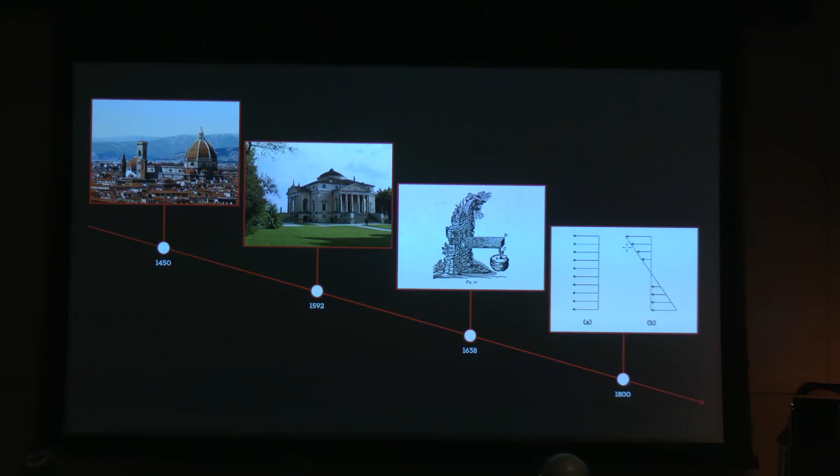On the far left, Brunelleschi's dome, developed by a single person and a lot of labor, and maybe a few other people, but generally Brunelleschi, well before the math to reference, no structural formulae to deal with, and no engineers to hand a sketch off and ask how big the chain around the base should be.

Palladio, with his palazzi and villas, all amazingly beautiful, with nary a structural or mechanical engineer in sight, and basic graphic statics and an understanding of prescriptive methods at his hands, and that's it. And by the way, in the New York City Building Code to this day are not the rules for palazzi, but prescriptive methods for designing townhouses, where an architect can go into the code and build a townhouse and sign and seal the townhouse based on rules given by the code that were first written in the 1800s. So this tradition lives on.

So then you get to the third slide. 1638, 200 years after Brunelleschi, Galileo, the father of essentially all of science, ventures into structural engineering, and among us structural engineering nerds, completely blows it. He posits that the stress-strain curve is pure stress or pure strain, and that the piece of wood in the wall will simply pull directly out of the wall when it fails rather than rotating about its neutral axis.

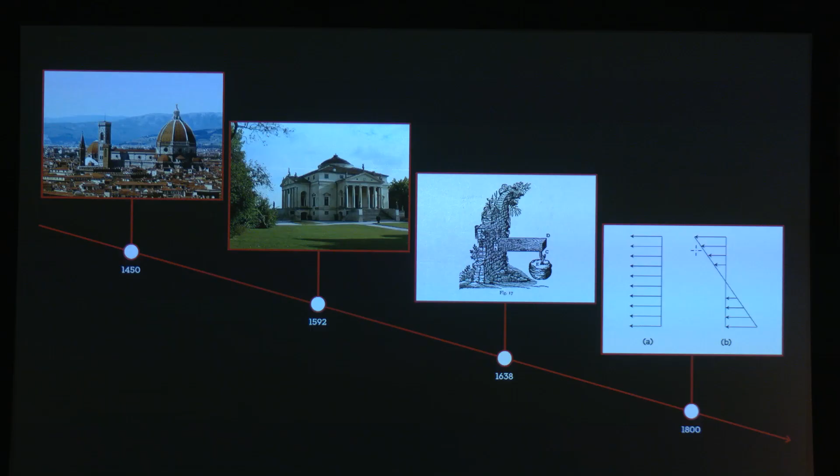It takes 150 years for Navier to come along and point out that Galileo was wrong. He had to wait till Galileo was dead and so on, but he did point out he was wrong. And he essentially births the modern structural design movement 350 years after Brunelleschi builds his dome.

We head into the 19th century to the Crystal Palace, and Joseph Paxton develops this building based on experimenting with flowers and lilies, according to the, of course, always truthful Wikipedia. It is said that he floats his daughter on a bunch of lily pads to figure out how strong they are, and he builds the Crystal Palace.

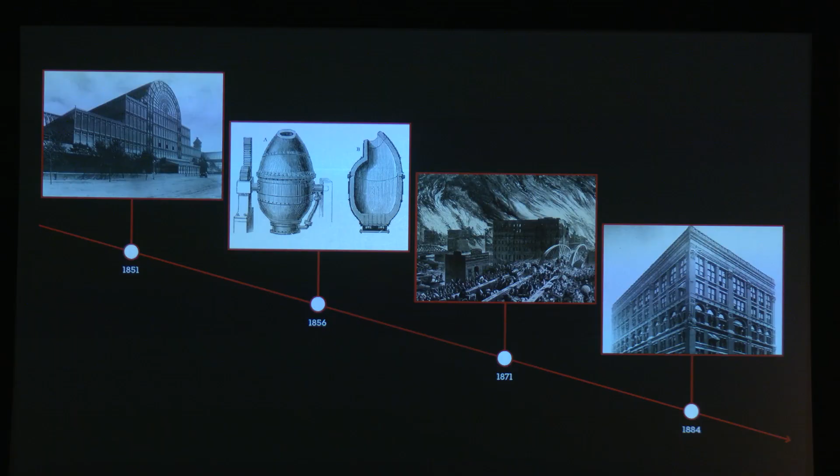Bessemer comes along in 1856 and invents carbon steel. But nobody cares about carbon steel until the Chicago fires and William Le Baron Jenney's Home Insurance Building. Still, not an engineer in sight. William Le Baron Jenney graduates a year before or a year after Eiffel from the L'École in Paris, and basically goes it alone as architect, engineer, and builder of the Home Insurance Building.

And then the birth of modernism. And the entire idea of modernism around technology, minimalism, or efficiency, let's say, and materials. And yet even the modern masters really embraced, and it was unfortunately, the great man theory. The modern masters went it alone for the most part, with very little reference to collaboration within the earliest masterpieces of modernism.

And in fact, the story is that August Komendant, who is the structural engineer for most of Louis Kahn's work, boycotted the opening of the Kimbell Art Museum out of distaste and anger at Kahn for dismissing his contribution to Kahn's work. So there was not the collaborative spirit that you see these days.

Utzon famously wars with Peter Rice and Ove Arup throughout the entire design and construction of the Sydney Opera House, developing what is clearly one of the most iconic and beautiful buildings in the world, but has nothing to do with the shell structures of Candela, Nervi, or Torroja. There is more reinforcing and concrete in the base of the Sydney Opera House than you'd find in almost any concrete structure around. So we are not quite at collaboration.

What I would put forth to you, and I can be corrected, we can all play this parlor game. Feel free to correct me. This is a very quick survey. What I would put forward to you is that it is really not until the Pompidou Center, and it's not because I've been fortunate enough to work with Renzo Piano. I do think the Pompidou Center was one of the first projects that showcased, while there may have been collaboration on previous projects, the Pompidou Center was all about the collaboration between Piano, Rogers, and Peter Rice at Ove Arup.

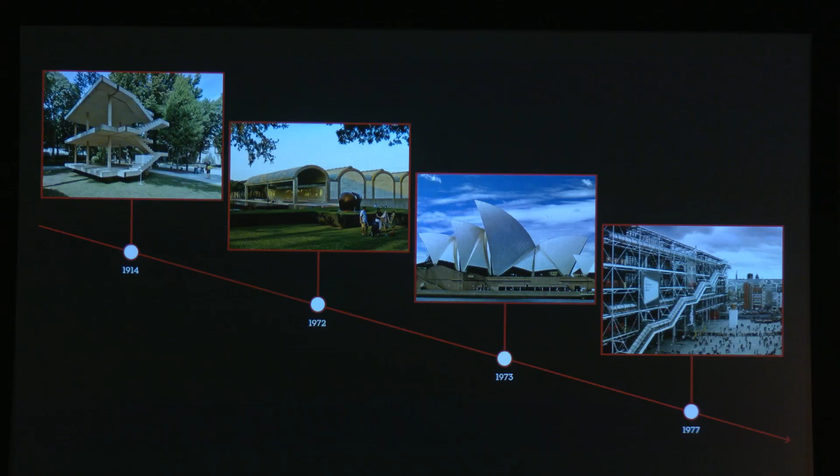So this is sort of the dawning in the early 70s of the idea that a team can build a machine. And they developed the Pompidou Center. I'm not sure it's too removed in my mind, as I thought about it coming into campus today, from putting a man on the moon and many other advances at that time. So the idea that a large team could get together and get equal credit and urge each other along comes into focus.

But think about where we are. We're 50 years back from today, and I started 500 years ago. So we're talking about 10% of the built environment around us, essentially, not by volume, but by years. Although a lot of those structures lasted quite a long time.

Mario Salvadori, a mentor of mine, comes into focus. He actually taught for years at Columbia, but he publishes Why Buildings Stand Up, and essentially changes the entire pedagogy of how structures is taught in architecture, where he really speaks eloquently and beautifully about the language that we speak between each other. And I want to keep an eye on that word language. All right, that is, to me, the key to everything that we discussed today.

Mario spoke of this language in a talk he gave in 1958 about teaching structures in architecture school, his early ruminations that ultimately birthed, as I said, a whole generation of collaborators. And I want to quote him here from that talk in 1958, quote, "And as soon as I say that we engineers are most eager to collaborate with you, I mention the first great difficulty. Architects and engineers do not have a common language."

"If you go to the average engineer and tell him," and he used only male pronouns, I apologize, "that you want to design space, he laughs in your face. If you tell him that you are looking for beauty, he tells you the only thing that matters is economy." We've come a long way since then. Through Salvadori, Rice, Piano, Rogers, and all the rest, we have learned to communicate.

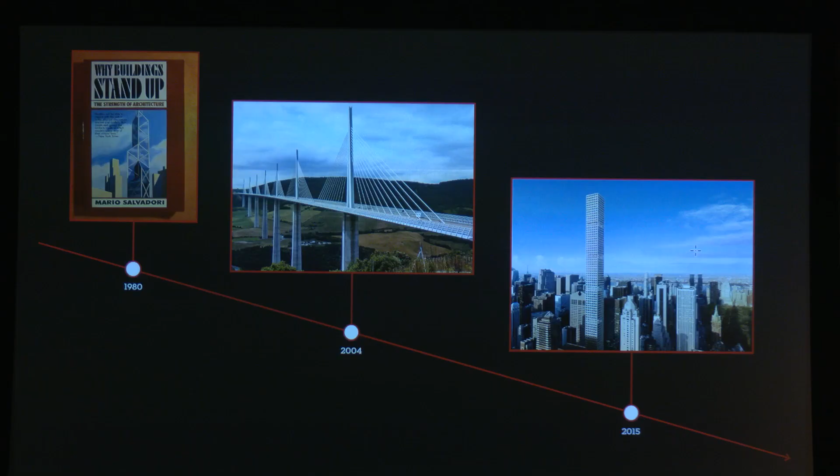No matter how inspiring a project may be, we do have a grounded, fundamental responsibility. Our primary goal is to keep the left-hand curve, the stress in the structural element, generated from external loads, far enough away from the right-hand curve, the material strength, so as to be safe, but close enough so as to not be uneconomical. Piece of cake.

It is a piece of cake once we get there, but 99% of what I show you tonight was accomplished well before we got to that point. I say this simply to note that one of the hallmarks of the collaborative revolution of the last 50 years is the invitation for us, the engineer, to join the conversation well before the bell curves are in play.

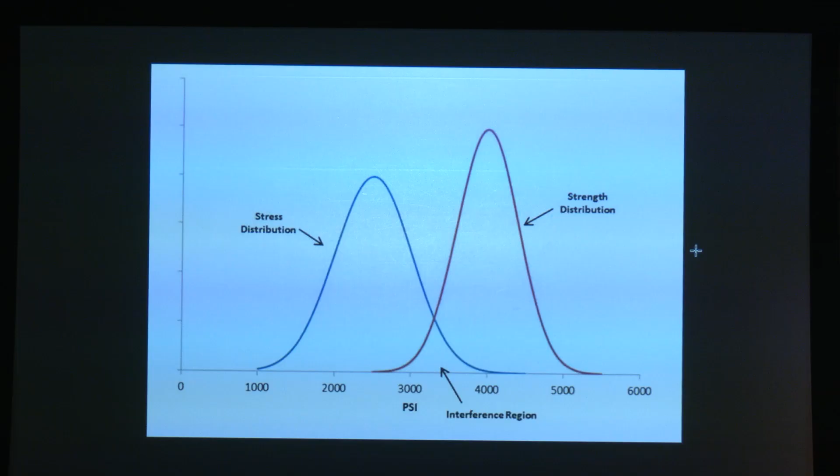In this case, the business of interrogating collaboration is to understand the balance we bring to every collaboration. The installation is temporary. Therefore, we get to play with that left side of the curve a little bit and the loads applied to the heart. And the ownership of the vision is firmly in the designer's hand. This is not a collaboration where we are upping each other's game to get to a new design paradigm. There is a design that we have to make sure doesn't fall down.

This language is one that often allows for mock-ups, in situ load testing, and the like. Designers have an image, they build it in their studio, and then we just push and pull on it rather than try to run models or basic formulae. This was especially true with the Big Bamboo installation on the roof of the Metropolitan Museum 6 years ago.

Big Bamboo is an installation designed by Doug and Mike Starn, who are well-known artists. There's an incredible video on YouTube from about 10 years ago, I think, or 8 years ago, where they literally walked this sculpture across their studio in the course of a year and filmed it in stop-motion photography, where they basically took bamboo sticks every day, took them off the back end and added them to the front end, and walked the sculpture about 300 feet like a massive slinky across their studio.

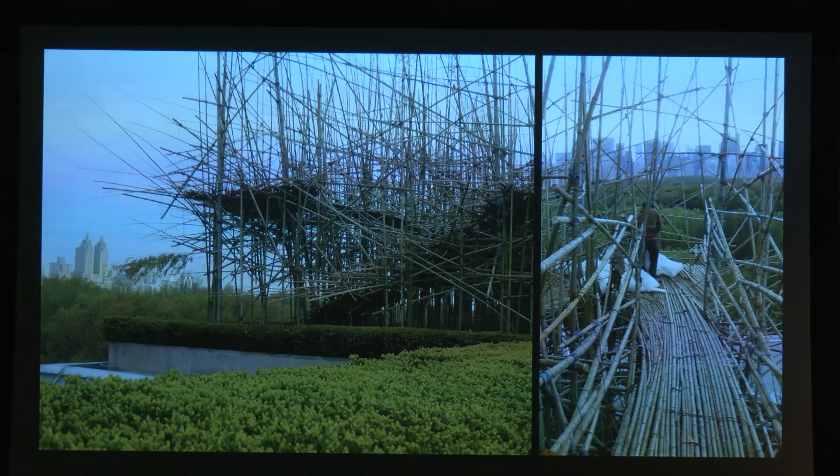The bags you see there are our version of load testing. We knew that this thing was not going anywhere. That's actually the first thought we had. So all we had to do was validate and prove that, and our collaboration with the Starn brothers was simply that they allow us to put some sandbags on the walkway and that we could look at the overall dimensions of this thing and get a general sense that it wouldn't blow over in the wind, which we then signed a letter to the building department, and all was good, and it didn't fall over.

It's unoccupied. So the biggest design collaboration portion of this project was essentially detailing the stone wall so that the excessive deflections would not crack the stone throughout and that the gaps in the joints would not be too big as to seem unsightly or veneer-like. But that was the extent. The other part of it was convincing the local officials and engineers that we were not insane, which we eventually did. They made us sign many letters, which we did. It stands to this day. The biggest challenge turned out to be that they were worried the bell would ring in high winds, but that was not our responsibility.

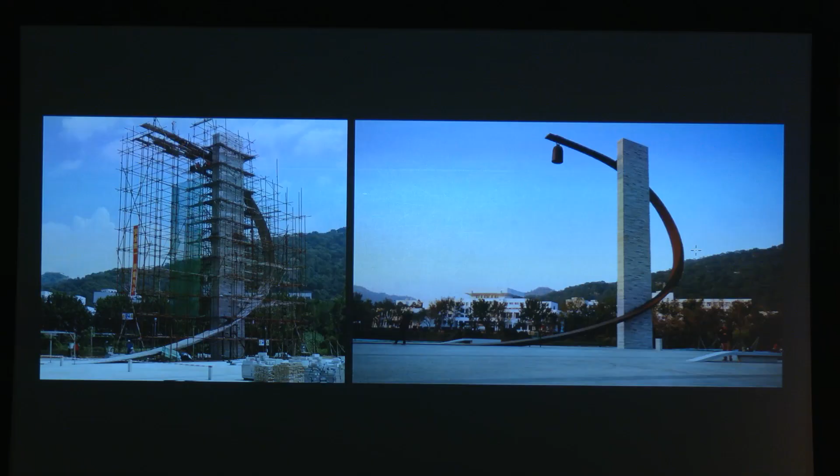So I want to now build a little bit to the next size projects. Before diving into full buildings, I want to go through a couple of small examples of projects where the collaboration was more about getting unique structures built. They weren't sculptural, they were architectural in a simple definition that they were there to solve problems that existed, and there was a client and somebody paying for this, and there was a desire to do something a little different.

So the collaboration on these jobs: this is a wonderful canopy installed at the University of Wyoming by Lewis Tsurumaki Lewis, LTL Architects in New York City. I've taught for 20 years with Paul Lewis, so we have a very close collaboration on these projects. And the basic idea was, how can we do this in a way that's detailed and designed that we can get local builders who are really busy and have no interest in doing something different to be interested, because we're using very, very common techniques to build something unique and different.

So the entire discussion around this collaboration was simply detailing the job in a way that allowed local subcontractors, again, they're not worse or better, I'm not making any judgment at all, they just have a lot of work. And why do this necessarily when you can do acres of the work you always do? So it was trying to figure out with LTL how to design details that mimic those other things they did, facades and so on, so that they saw this as another job that they would do with a slightly different skin that was delivered to them, and nothing else would be different.

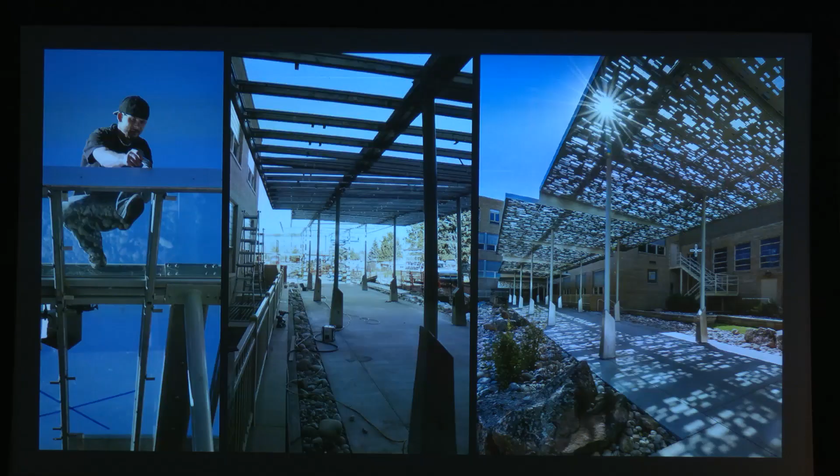We set all the columns at a certain elevation so that as they laid this canopy out, the work they were doing was no different than the work they would have done elsewhere, and resulted in a unique proposition. Similarly, the kayak storage shed at Long Dock Beacon that we worked on with ARO.

As I was mentioning to one of your professors during the tour of the studios, the interesting thing in New York, when I talk about collaboration, is that everyone knows everyone and everyone's related in some way. And Paul Lewis, one of the Lewises of Lewis Tsurumaki Lewis, is married to Kim Yao, the partner at ARO, and they all get invited to the same competitions. So I show these two back to back as also the relationships that evolve way beyond collaboration.

This project, which has been published quite a bit and we're incredibly proud of, was built for almost no money. What you don't see is a series of very simple galvanized beams above, 8-inch wide flanges, a totally common construction technique done by a local ironworker, a miscellaneous metal shop. I think they do motorcycle repair on the side.

And galvanized metal deck, composite metal deck, just hung from the bottom of the beam rather than placed on top. The storage racks provided lateral bracing, so we had wire cross-bracing across the basic off-the-shelf storage racks, allowing for 2 incredibly thin columns up front that did no work in terms of lateral.

Building again further, but in a very unique collaborative spirit, is the work we've done over the last 20 years with Gluck Plus. Gluck Plus is a firm that came out of the firm Peter Gluck and Partners, and now has 4 younger partners, younger, all in their 50s. Peter's son Tom, and 3 others who I've worked with now for 20 years. This is Tom Gluck's house, built on a shoestring.

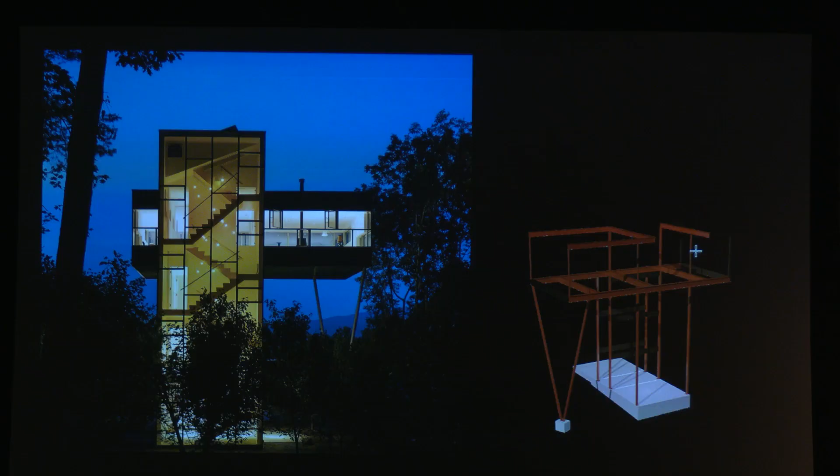So Tom knew he wanted to build this house for himself and his wife and 2 kids. He wanted it to be different. His father had bought a piece of land that he built his own house on 20 years before. He was able to afford this basic steel frame, but the rest of the house is all in simple plywood shear wall for lateral support, and then the upper portion is all various cost-effective, I'll say, not cheap, skins and so on that allow the house to rise up into the treetops with all the lateral being supplied by plywood shear walls at the base.

It did move a little bit until we put the windows in, which with a paying client that wasn't the actual architect, we probably would have not played with, but since we knew Tom wouldn't sue us, at least not yet, we were good to go.

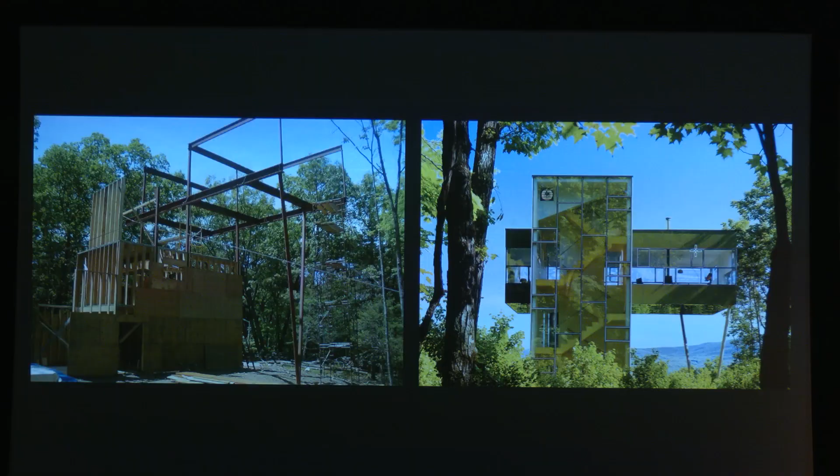This built into a number of projects with them, which I'll rifle through very quickly, but again, it isn't just small follies. This project in Austin, Texas, we ended up with a pretty massive truss, and again, a very close study. We probably studied 20 or 30 different truss profiles to get the windows in the rooms where they wanted, but an efficient truss that the house could afford. And it allowed for this sort of seminal moment in the house, a house that's pretty widely visited in Austin.

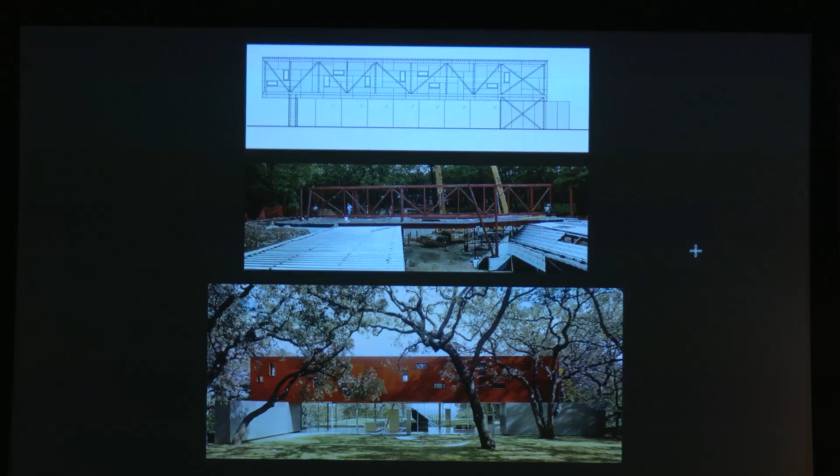And finally, out of about 30 projects we've been fortunate enough to do with Gluck Plus, is a recent wonderful project in the Bronx. This is a public tennis facility that was built about 2 or 3 years ago. Gluck Plus, because of the work they do and the way they do it, was able to build this facility for about 1/3 what all the other competitors said they could build it for.

Mainly because the way Gluck Plus works, unlike any other firm we work with, is they go out and they bid out packages in a piecemeal way that they control. So they bid the foundations before any of the rest of the structure is done. They get feedback, they understand where the price points are, they tweak the design to fit the best price for the sub without losing all the design. Then they send out the steel separately because they're not getting yelled at by a CM or GC to keep the process flowing. They control it.

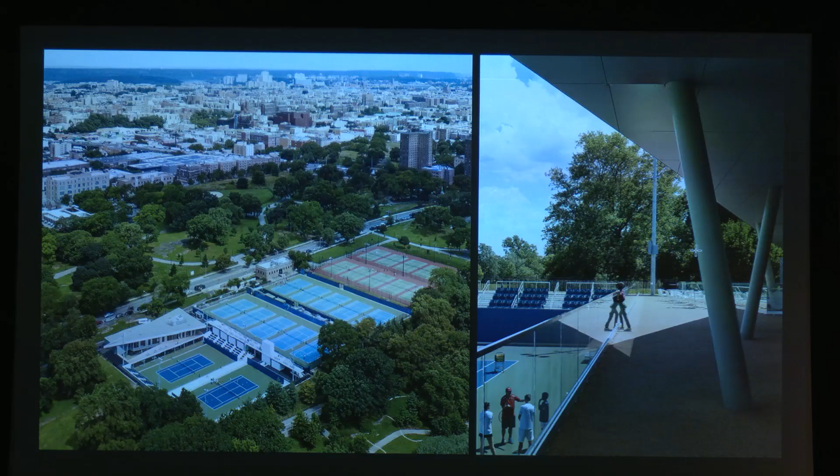And we're able to play with forms and ideas with them in a safe space that doesn't necessarily exist when you're trying to speak the language with a client paying a huge amount of money and a school or an institution that wants very firm answers along the way. So the final project, again, for an underserved community, a public tennis facility well beyond a lot of private facilities in New York.

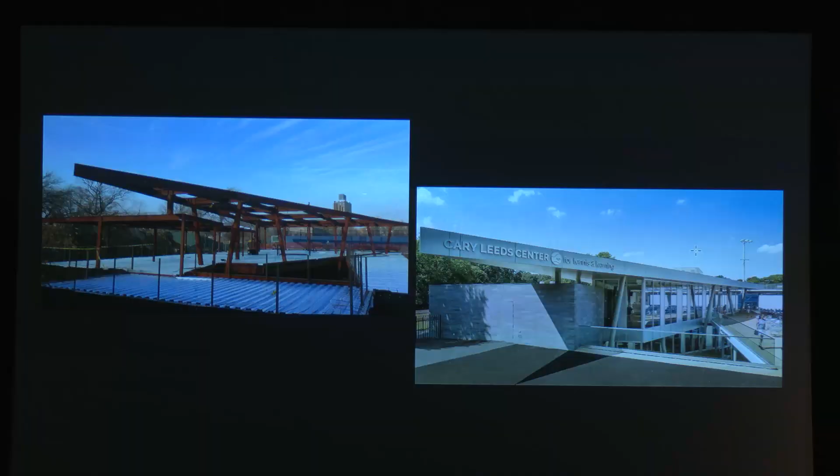I want to now, that safe space, that idea of playing with folks like Gluck Plus and others where we can really go out on a limb. So our firm has done a huge amount of private residential work over the years. And people are like, why are you doing houses? Houses have budgets often, not Tom Gluck's, but many, that afford you the ability to go way out on a limb. You get to do a lot of R&D on houses where the owner is paying $2,500 a square foot, or where the architect's actually building the building. And we take these things and fold them into bigger high-profile jobs.

this is 6 out of probably 70 different tilting schemes where we basically registered in a roundabout way with their office multiple generations of tilted column design until we came to a place where Steven's aesthetic values were pleased and the economics of the tilt made sense. That there was enough static equilibrium that we weren't putting huge amounts of concrete in the ground to hold it up and not a huge amount of steel up above.

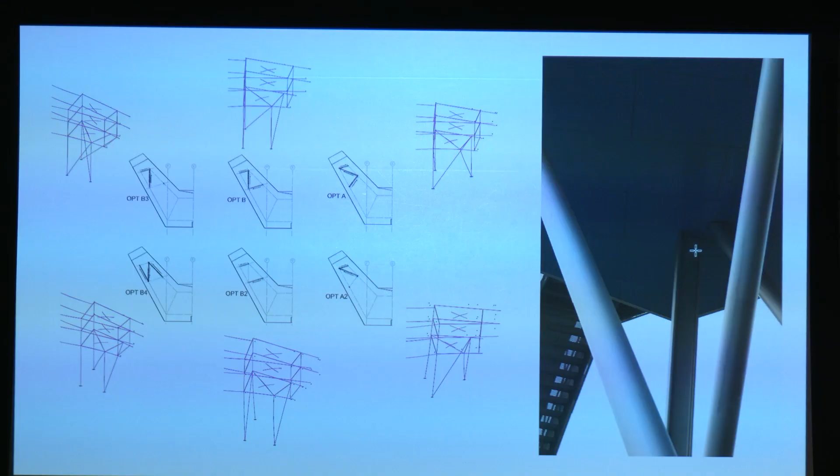And what better trope to call on, which I have before in other lectures, I apologize, but it's too good to pass up, in terms of sticking together even when emotions run high, than my old friends, Mick and Keith. It's a trope I have leaned on before, and it is one that I cannot get out of my head, ever, 25 years after first hearing it.

The genius of Keith Richards, it has been documented, and this is an actual quote from a musical history book, is his ability to play a microsecond behind Charlie Watts, the drummer, showing my age again. And it is this talent that makes the Rolling Stones, as a 53-year-old, the greatest rock and roll band ever.

The structural engineer, I would posit, must figure out a way to ensure that as a collaborator, we support the architect without falling too far behind or getting too far ahead. With this construct in mind, I often see my role that microsecond behind, propelling the design forward without displacing the effectiveness of the design partner.

What does a long-term working relationship look like? How do you spend so much time speaking unique languages with specific teams that you can naturally fall right into a magical pocket behind the driving beat? It humbles me a great deal to show the following series of images and a small portion of our work with Steven Holl and Renzo Piano Building Workshop in an effort to show how these through lines can elevate language over a series of successful projects, and still lead to unique solutions. So I'm going to rifle through these a bit to give you a sense of these collaborations.

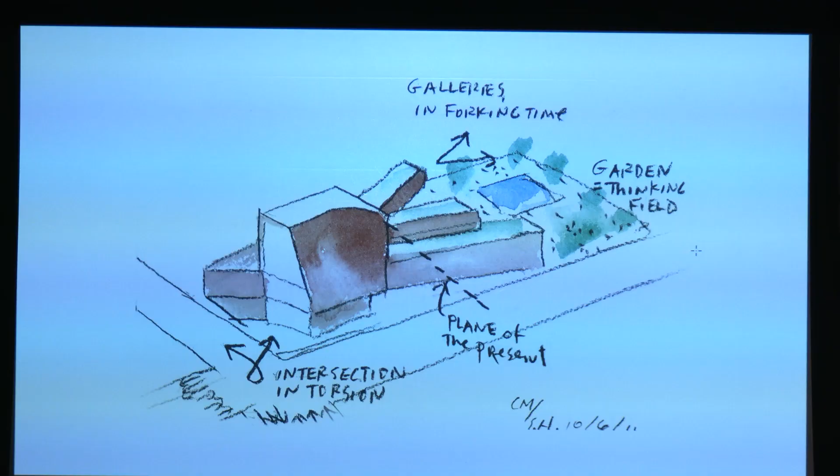Again, the watercolor that starts every Steven Holl project. This is VCU, the new art museum, opened about 2 years ago at Virginia Commonwealth University. Again, similar to Campbell Sports Center, the interrogation of the monumental curved wall at the entry to the museum. As Chris McVoy, Steven's partner, who I've worked with now for 25 years, will tell anyone that listens, and he'll sit there with the model with every subcontractor: the curve is a ruled surface. He'll take his credit card and constantly wipe it down the surface to make sure the subcontractors understand it's really a piece of cake and nothing to worry about.

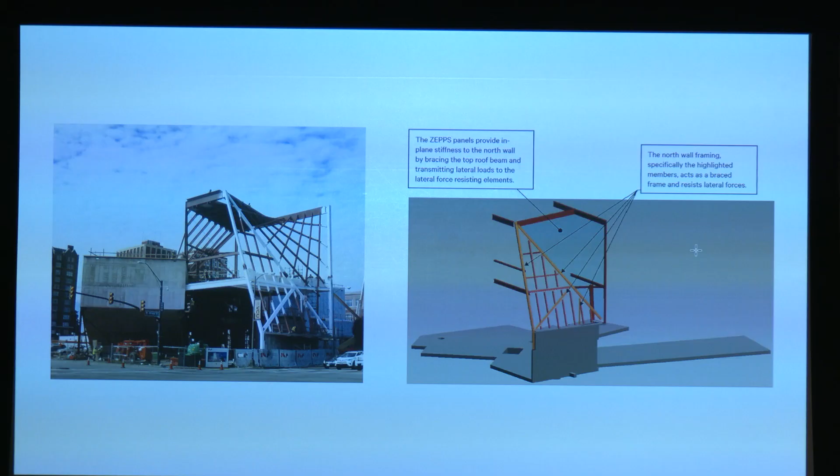We studied every different variation on this: concrete shells, light gauge metal, steel frame, ultimately settling on a design-build scheme with Zahner, the facade manufacturer, on an integrated facade approach that used tubes and lighter structural shapes to back up the Zahner facade. But the project itself, like many we've done with Steven, was an amalgam of multiple design schemes. So for those of you who are studying singular design attempts at each project, know that there's a world out there where you could have a steel facade with precast plank, post-tensioned concrete slabs, and massive steel transfer plate girders in the interior of the building.

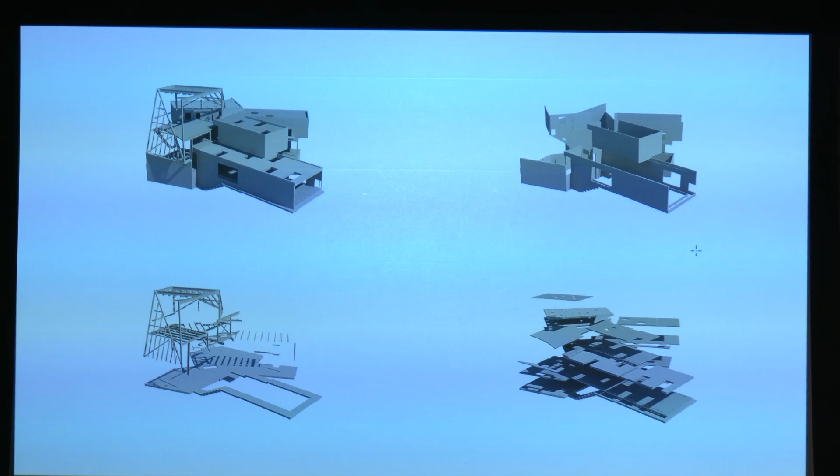These are all the precast plank and poured concrete elements, the steel sticks, the foundation, and the bearing concrete walls of this project. In construction, this was a series of boxes that come out appearing to float. What you don't see are the large cantilevered beams coming off of this mass, meeting other cantilevered beams on this mass, singular hidden columns within the formulation, and the facade at the entry ultimately being realized on what is now one of the most highlighted corners in Richmond, Virginia. Again, done for a client with tremendous aspirations at ultimately a very tight budget.

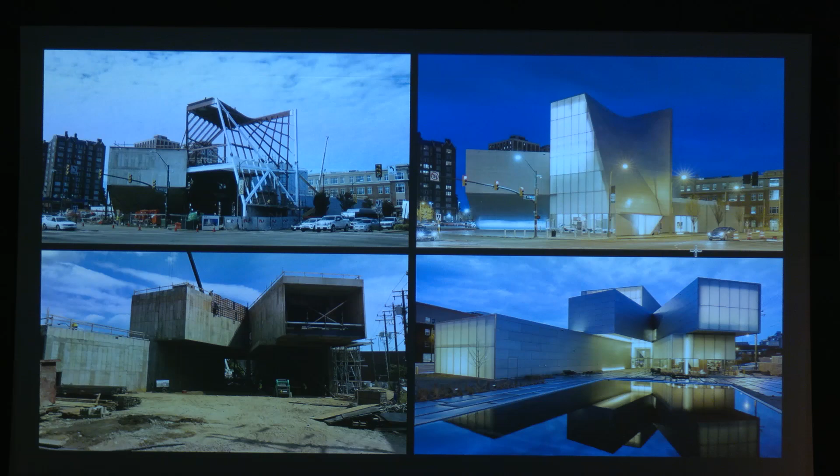The next project is one that recently completed, opened last spring. We're incredibly proud of what they're calling the Reach, which is the new addition at the Kennedy Center. Steven Holl won a competition about 3 or 4 years ago for this. What Steven will say, it is the largest green roof in the country, 70,000 square feet of occupied space under the landscape, all designed to basically house major rehearsal spaces and the majority of parking coming off Rock Creek Parkway. Also included in the job was a very shallow bridge that features a mass damper in its base to limit vibration given the shallowness of the depth, to both allow for head height over Rock Creek Park and a height restriction coming across the parkway.

So these buildings were idealized originally as a white marble to match the original Kennedy Center. Value engineering turned it into exposed concrete. A unique aspect of this project was that it was not a museum. So in museums where we're constantly fighting exposed structures in the Northeast and the inability to celebrate any sort of exposed structure, we were left with a concrete wall poured in place, exposed on both the interior and exterior, and large open volumes inside.

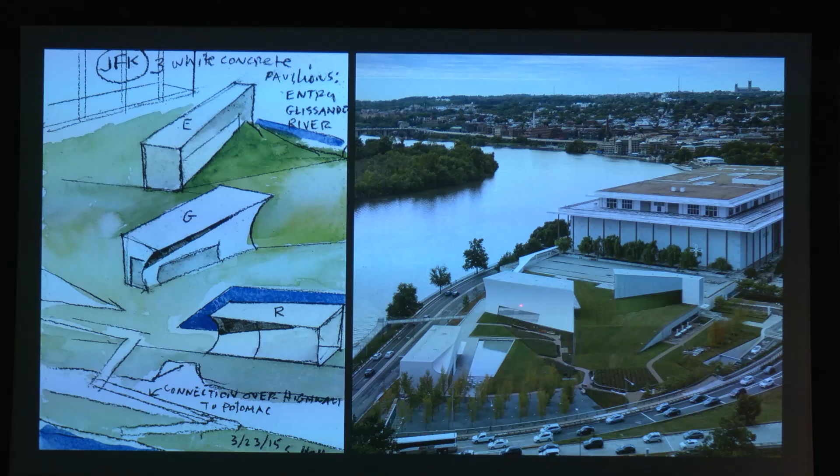Trust me, there's amazing images online of large volumes in the middle of the space, allowing the air to stratify and the conditions of condensation and so on mitigated, where in any other museum building, the idea of an exposed concrete wall in the Northeast would be anathema.

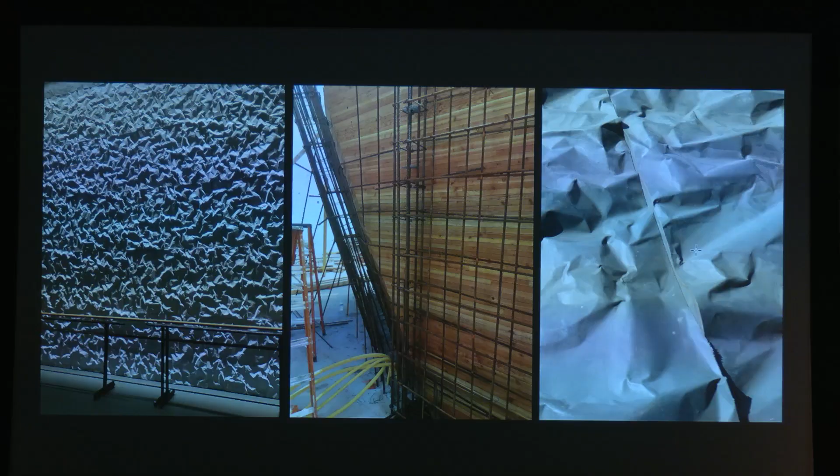Many of the features of the project were after years of experimenting on smaller residential projects and gallery spaces with Steven's office, including these crinkled concrete walls, formwork that was placed within the form, so this is the actual concrete poured, and the reinforcing behind this formwork, very conventional.

Among the other challenges on the job were this 60-foot tall curved wall whose formwork had to be custom designed, and pressures at the base exceeding any that we could handle with formwork, so lifts had to be poured at about 3 feet at a time in order to build this entire wall the whole way up. One lift hardening after the other going up through the wall.

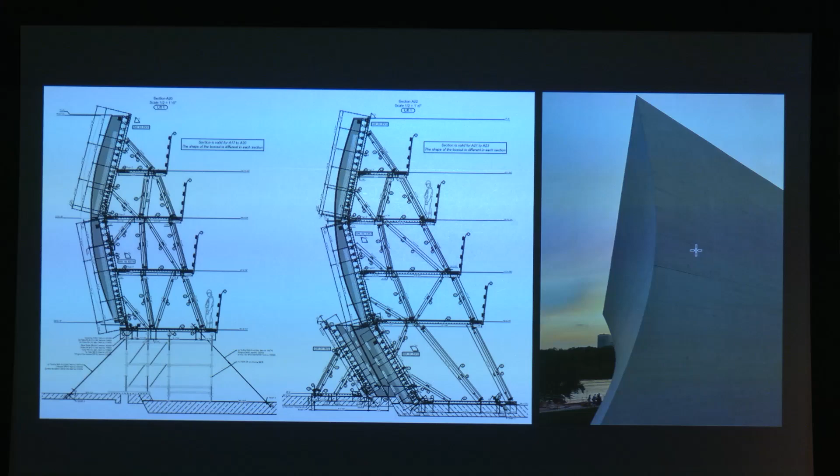We looked at shotcrete, we looked at self-consolidated concrete, we looked at ultra-high performing concrete. We ended up with sort of the down and dirty cast-in-place concrete, however, done in a very controlled manner with a variety of lifts. And finally, the sawtooth in the performance space.

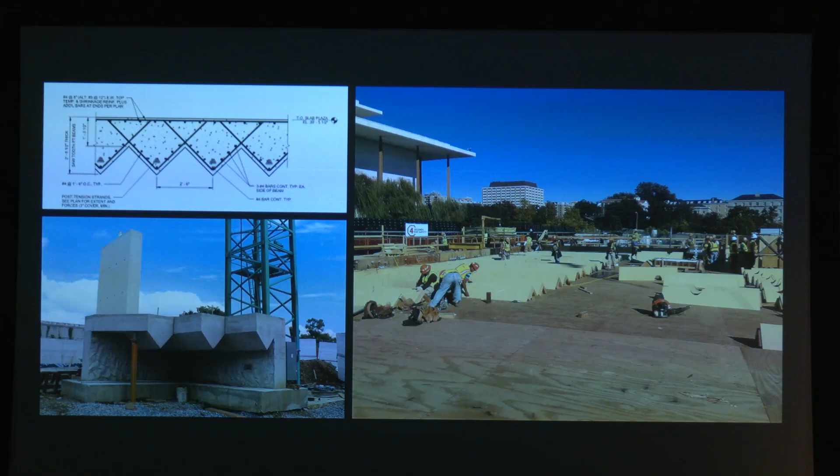If you go into the main performing space within the Kennedy Center, the Reach, is this sawtooth form, which is not only sawtooth form, it is post-tension 70-foot span with most of the action for the structure happening at the valley of the sawtooth. This is the space before it was painted blue with the crinkled concrete walls. There it is, blue above.

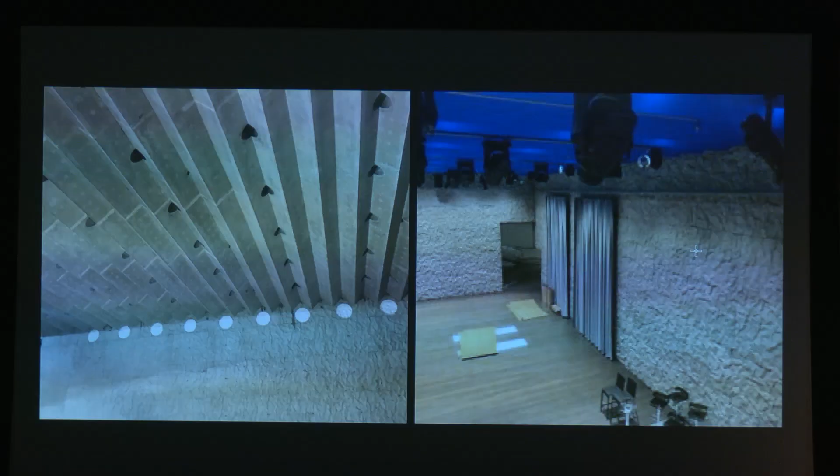It's fairly dramatic. And again, we mixed on this project post-tensioning, void form concrete, so there's Cobiax bubbles all throughout this project. For those of you who have looked at Cobiax bubbles, or the fiberglass balls that they put in concrete slabs now to allow for a thicker slab and less weight, mixed with post-tensioning, and mixed with a number of steel structures, including the bridge.

Finally, with Steven Holl's office, a project that's just about to open, the Arts Museum at Franklin and Marshall. This project brought us back to earth, but again, it's that collaboration where we knew what Steven was trying to achieve. We've worked with him enough that at this point we can sort of look at the watercolor and understand what's going on. So this was the original.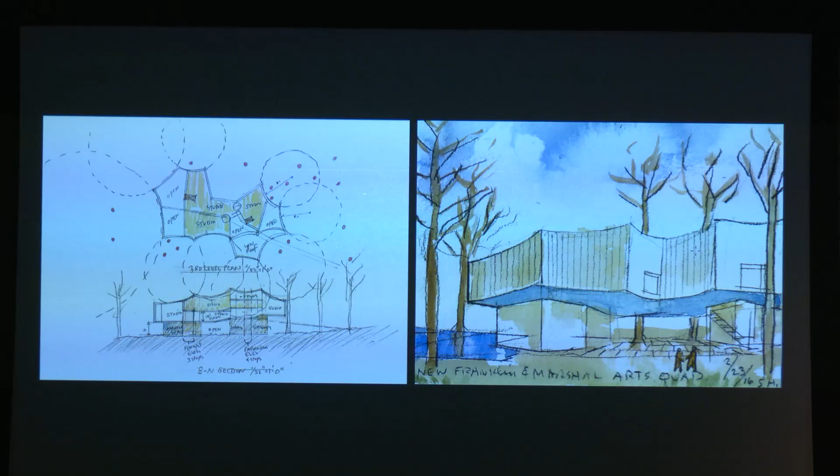It's for Franklin and Marshall, Benjamin Franklin's namesake school. The idea of the kite, even Stephen can be fairly literal in his architecture at times. And how do we achieve that again, like Campbell Sports Center, in an incredibly cost-effective, or shall I say aggressively budgeted project?

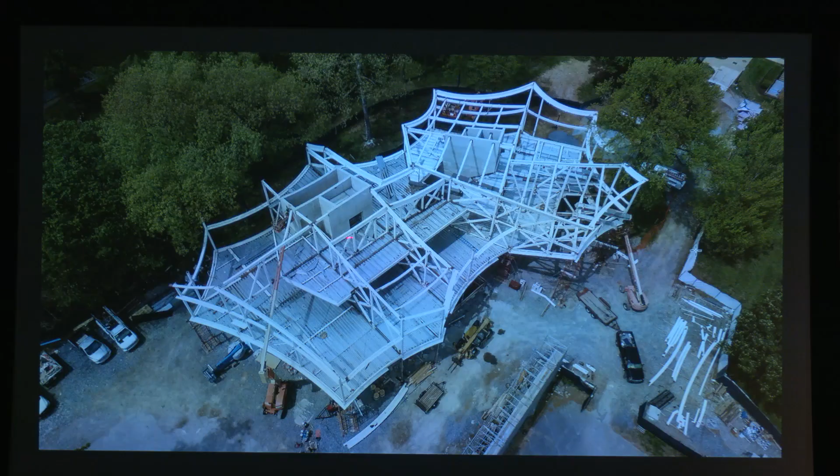This one ended up being primarily a steel structure with trusses used throughout the project to cantilever off a concrete base of cores that follow all the walls inside, and a simple, quote-unquote, sort of umbrella structure around the perimeter of bent steel beams to form the outside edge, with rolled tubes forming the purlins across and the roof down the side. Oops. Sorry. Getting ahead of myself again.

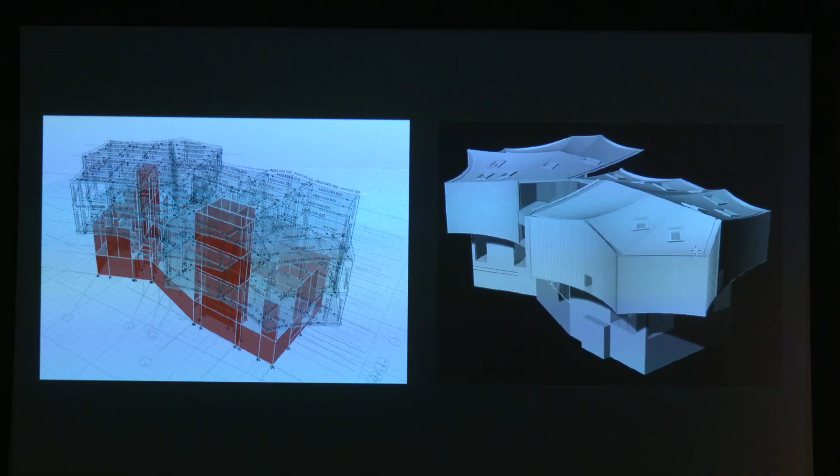This shows the tubes that fill out the roof and the idea of the form when it's finished. The roof has recently gone on, hopefully opening and published soon. But again, even having accomplished the work we did at the Kennedy Center and post-tensioning and void form and all these things, it was joyous for us to sit down and return to a project with Chris and Stephen's team and many of the same people from VCU and from the Reach, and just try to figure out a nice, simple parti for this building that we knew didn't have the budget or time frame that we would have on the others.

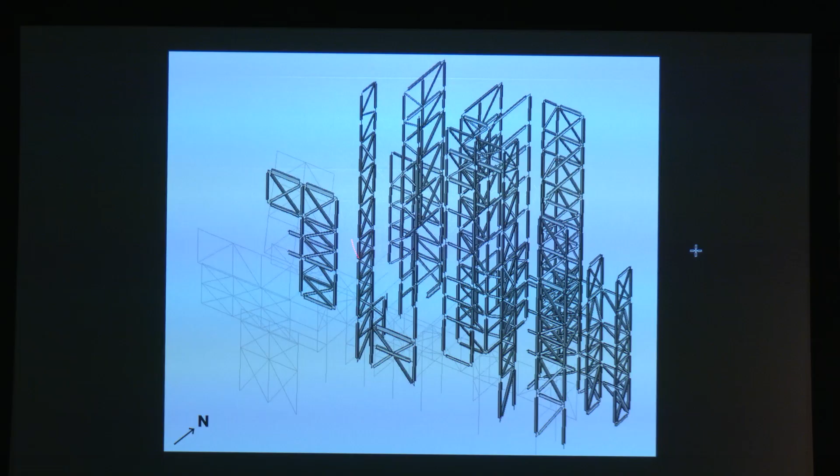And with Renzo's office, we've been fortunate enough to again up the ante further and work on many high-profile projects, including the Whitney Museum in downtown Manhattan. The key to the Whitney being that the entire lateral system of the building essentially is housed in the north 2/5 of the building. The southern 3/5, for those of you who have been to the Whitney, are massive column-free gallery spaces. Now, when you look at the frames, this is what exists within all the offices of the Whitney Museum.

The only lateral piece out on the southern edge are the two brace frames you see in the glass wall of the bookstore, acting somewhat like a spring over here, not taking 3/5 of the load, but basically just stabilizing the southern facade, which above this is purely solid facade, housing a skylit gallery.

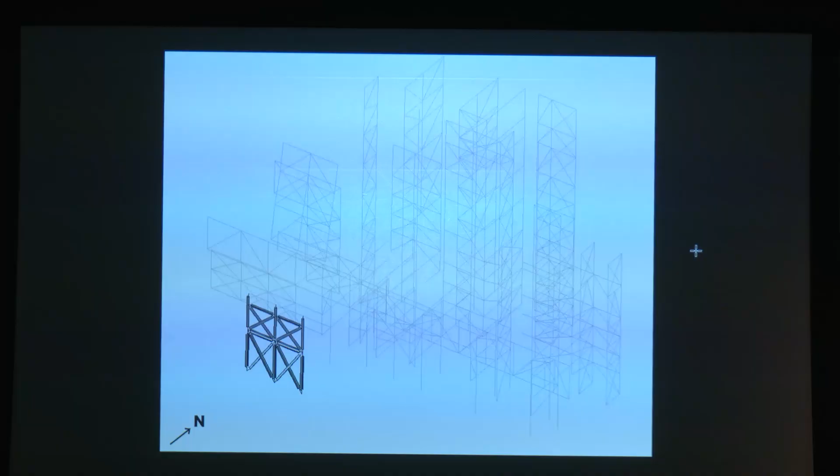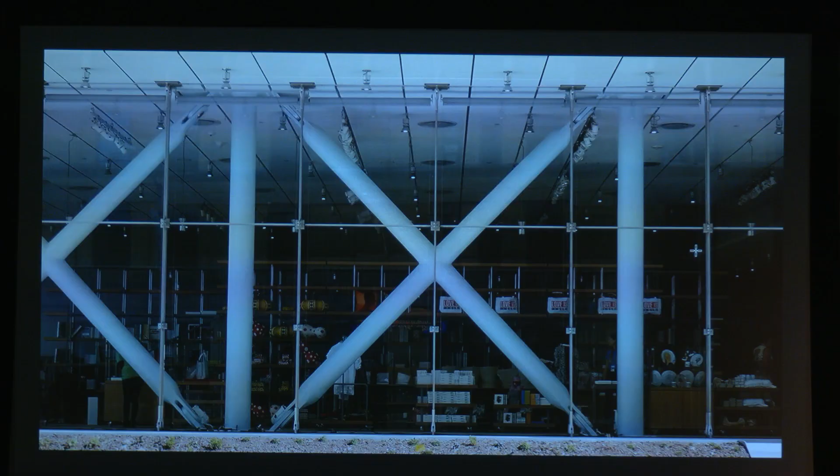These, again, being Renzo Piano, the two cross braces that are seen, highly articulated, custom cast fixtures at the connections and so on. You will note the beautifully symmetric X bracing, and you will know as an engineer probably that the actual beam is about 6 feet above where this cross brace meets, putting a lot of local bending on the column. Still, it looks quite lovely in the window.

Part of the challenge of the Whitney was, again, the procession. With Renzo, the language is less about the overall image, the massing, the watercolors, the realization of these ideas. With Renzo, it is about machines and getting to the sense of order. And in a way, that makes our job really easy and really difficult. On the Whitney Museum, it was a 20-foot grid. Anything you did on that job was on a 20-foot grid. If I had a question, I went to some multiple of 20 or some division of 20.

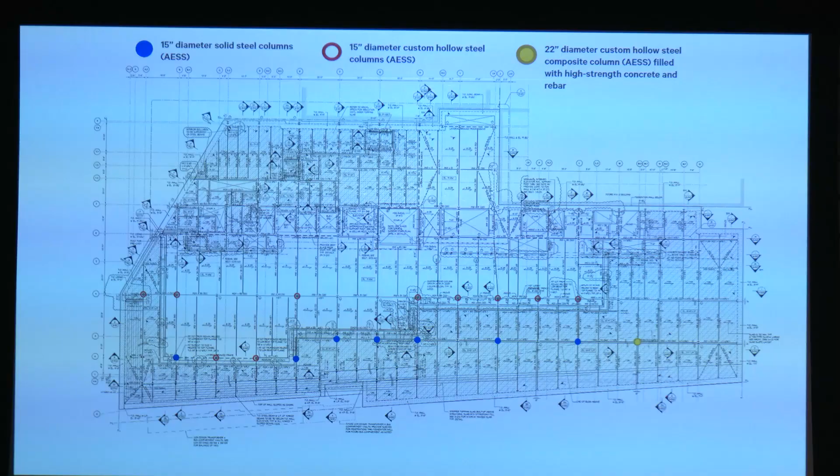And the columns in the lobby being no different, although they change in height as you go east along the length of the building until you get to a 50-foot tall single column at the outside of the building, holding up this entire end of the building. This, that yellow dot, is the only structural element that I've ever designed that caused me to drunk text an architect one day when I saw the column erected. I texted Renzo's partner and said we shouldn't have given in, because we had designed a completely cantilevered building at this end, and we saved $1 million by putting that column in. And to this day, I wish we had fought for that $1 million, but it's not my $1 million, so I don't get to say that.

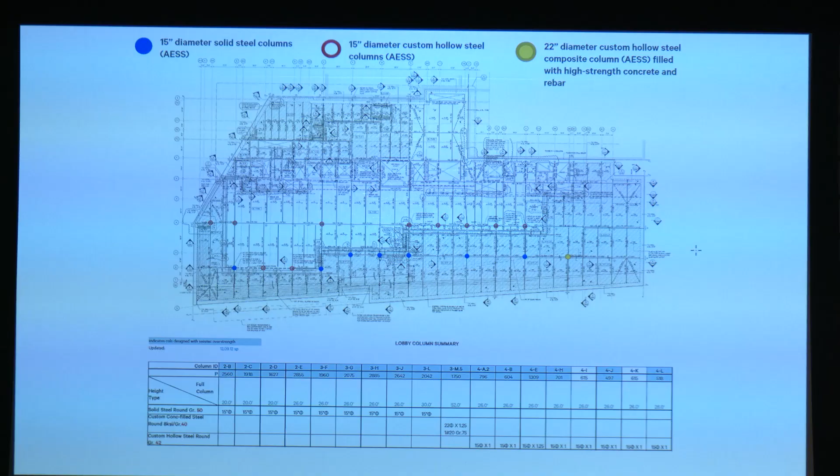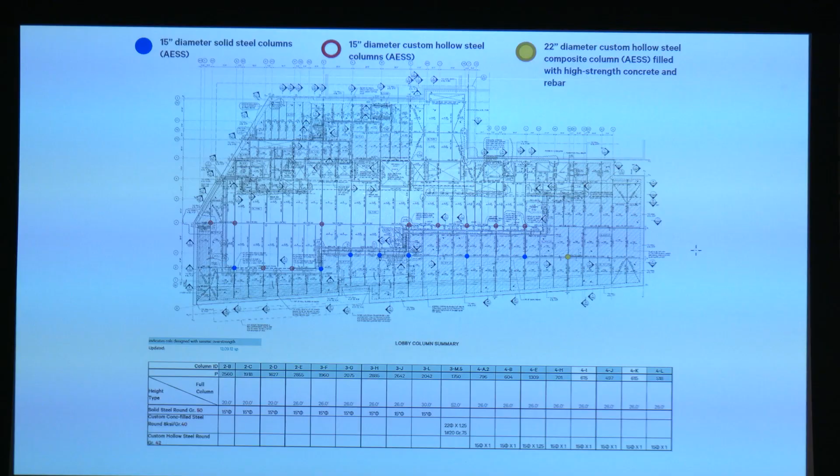The studies, again, knowing that the language of the repetition, the modularity, the rhythm was there, we then had to just figure out how to address that. Now, we knew, working with Renzo, that we could not put massive moment frame columns in there that were covered with fire troll covering. Renzo doesn't do fire trolls. So we knew that these had to be true columns, intumescent painted. They had to be related in some way. The blue dots are solid 15-inch columns. The red rings, hollow 15-inch diameter, where the load allowed hollow versus where solid was needed. All 15-inch diameter. We sourced a 22-inch solid steel column, but the schedule didn't work out, so we went with a concrete filled, which is a real shame.

This being my drunk texting column here on the outer edge, and these the procession columns as you go up the Whitney with the High Line right here, for those of you who have not visited the Whitney. Renzo, again, constantly looking for truth in the structure, although I did tell you about those cross braces, and it is being videotaped, so I'll have to edit prior to sending. I want to get this number right, sorry.

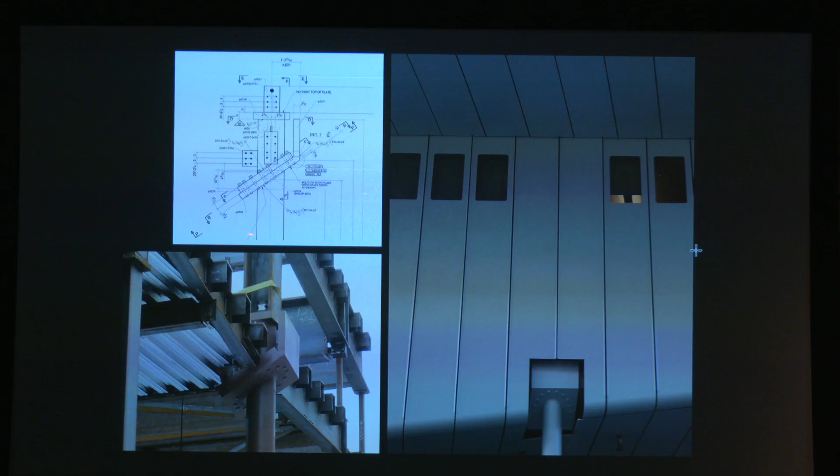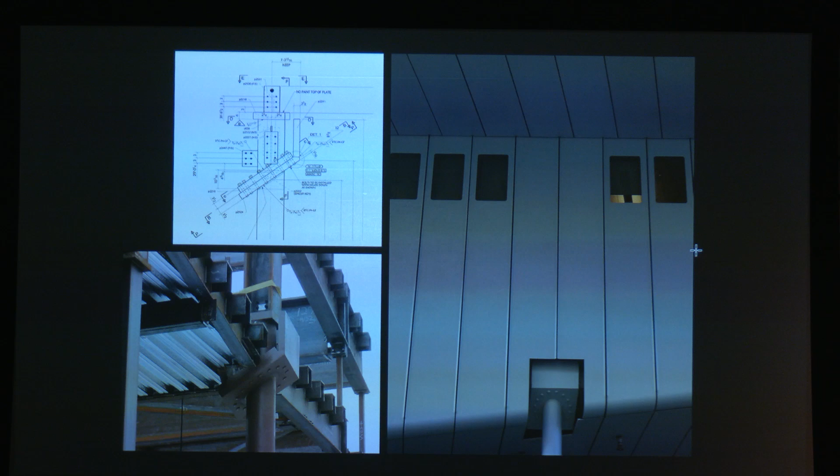1,000 kips of load, 1 million pounds coming down this main building column, and meeting what is not artifice on the Whitney, but a true canted base plate. I was telling somebody I did a lecture about a year ago on this, and I forgot we had put a massive shear lug in there. And I did this entire lecture looking at those bolts, confidently standing up in front of a group of people saying, 1 million pounds, no problem, and thinking in my head, I got to get back to the office and make sure this is okay. There is a large shear lug in there. You can sort of see it dashed in there.

The next project, again, rhythms. Language with Renzo Piano's office, the historic Fogg Museum at Harvard, with the addition that Renzo designed that opened about 5 years ago. The key element, other than the galleries in this space and the reworking of the existing building done spectacularly beautifully, I think, was the lantern. That essentially won Renzo the project. And the idea was a massive, as Renzo's known to do, machine-like skylight at the top that included shading devices and all sorts of mechanisms, evocative of the work at Pompidou Center throughout his career.

We knew, having worked with Renzo's office, that the idea of intumescent paint on these steel elements was anathema. For those of you, intumescent paint is fireproof paint. It seems to be the get out of jail free card for many architects when they don't want to put spray-on fireproofing. It is goopy. It looks horrible. It is not exposed steel. It's just really goopy paint. So we knew part of our job was to try to figure out a way to get the building department to buy that this was not a roof.

It was instead just a sort of big skylight. And so our approach from the beginning was to design a truss around the ring of the building, right off the historic parapet, that acted both as a brace for the parapet and the building and a support for the skylight, so that we could prove to the Cambridge Building Department that this building would be safe with the collapse of the skylight. Ultimately, they bought that justification.

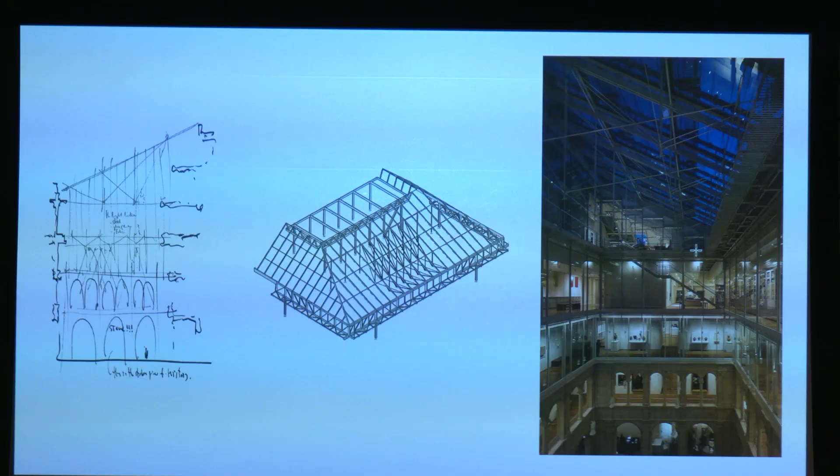One of the interesting parts of this project is that Corbusier's ramp that he designed for the Carpenter Center next door comes onto our site. The original proposal was to cut the ramp off right here at a joint that existed, store it for 2 years, and bring it back.

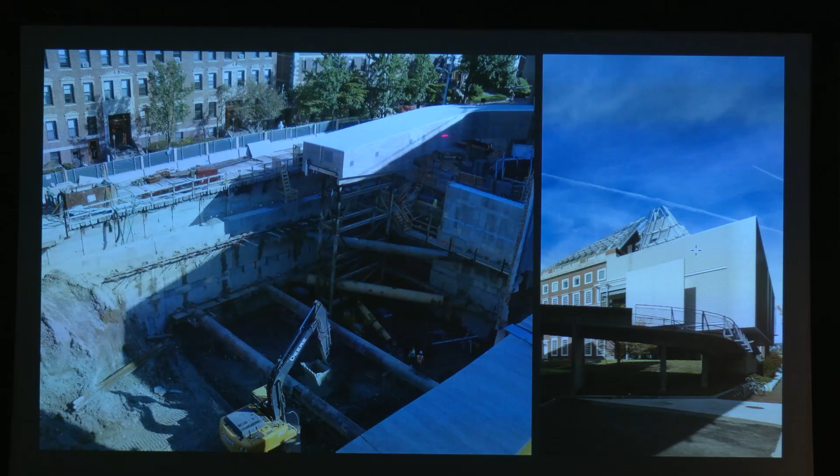The architecture school freaked out about that, said we were not allowed to do that, and convinced the president of Harvard to convince us, and then Harvard board members, to spend an extra $3 to $4 million to suspend the bridge 40 feet over the excavation while we dug a pit 30 feet into water and built the entire building back up to a plaza where we quietly resettled the ramp back on top of the roof that was 3 stories of occupied space below. So sometimes the collaboration is with another group of architects in another part of campus.

Finally, with Piano's Office is a project recently opened about a year ago in Des Moines, Iowa, the Krause Gateway Center, otherwise known as the headquarters of Kum & Go. Do they have Kum & Go's in Oklahoma? Yes. One of the largest chains, I think it's the largest convenience chain in the Midwest, or so they told me. There's a great picture I have of Renzo Piano wearing a bright red Kum & Go t-shirt at the first kickoff meeting.

We knew in this project that the idea we had to carry out were these massive cantilevers of the building, this cantilever being about 36 feet, or this one's 24, this one's 36, 18, and 12. And we knew that based on schedule, we wanted to get them in and completing the offices well ahead of putting the entire brim on the hat. Because we also knew, working with Piano's Office, that there would be a lot of discussion about the materials that went around this brim.

So we spent a lot of time detailing and designing that cantilever, this being the outer edge of the cantilever, this cantilevered beam connected to the building structure at the glass line in a way that allows us to macro adjust for level at the back end and then micro adjust the edge so that the line is perfect at the very end.

These elements went on the building probably 9 months to a year after the main carcass of the building was complete and much of the interior work going on, including the facade on the building. We had to store the facade, we had to store pavers and so on outside on the edge of the raw steel before putting these materials on, to allow us to put the facade in so that when the materials went on, the deflection didn't harm the facade.

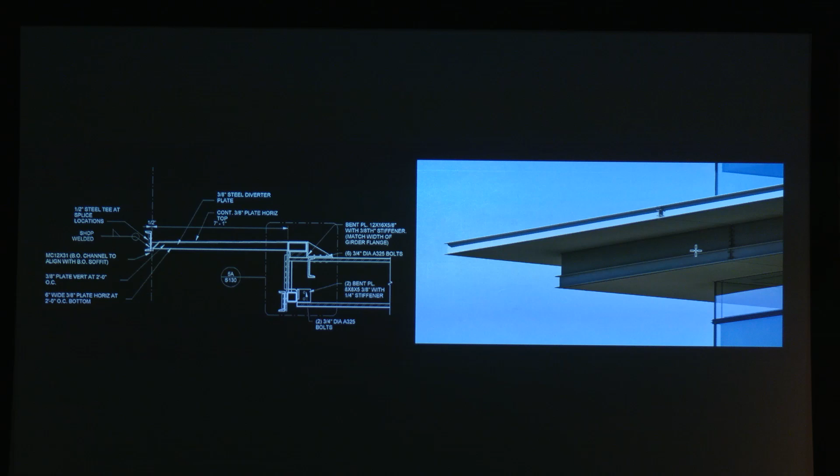So many of these projects, the facade detailing is so tiny that you have to pre-deflect the structure so that any loads that go on the building after, other than live load, any dead loads that go on after the installation of the glass, your steel does not move. So this is construction photos of that cantilever, and you see this entire sort of infrastructure built out prior to finishing that allowed multiple moments of adjustment and essentially 6 months of tuning the building prior to final cladding.

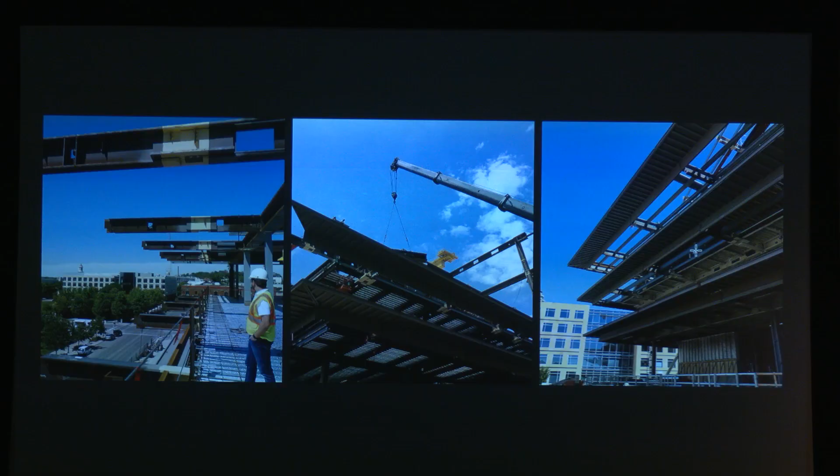So a final pause before the next series of photos and a quick diversion to bring us back to reality of everything I talk about here. There's a desire for absolute inspirational objects, and yet there's often a checkbook, and that checkbook's attached to a bank account, and that bank account most of the time is attached to a finite number of funds. I've often pointed out to frustrated team members when we're beaten down in a value engineering phase or our sanity questioned as we present our new 120-foot cantilevered balcony that most every client wants a Monet, and yet they want it for the price and schedule certainty of a refrigerator.

That is our lot in life. That's reality. Ignore this reality through your career at your own peril. Given this reality, it becomes even more critical that we speak the same language as the architect and the other team members so that our prompt solutions, suggestions, and ideas drive the design forward to unique solutions while at the same time respecting the constraints of the project.

There's a great, wonderful myth that tension between the architect and engineer will generate better projects. I don't believe that. Where successful, our collaboration is not a parrying back and forth in place. It is an advancing of aspiration to a built reality. I would simply ask, as you look at the next series of buildings and examples, to keep that in mind. Communication without a common language can stagnate, and discourse with a language often advances.

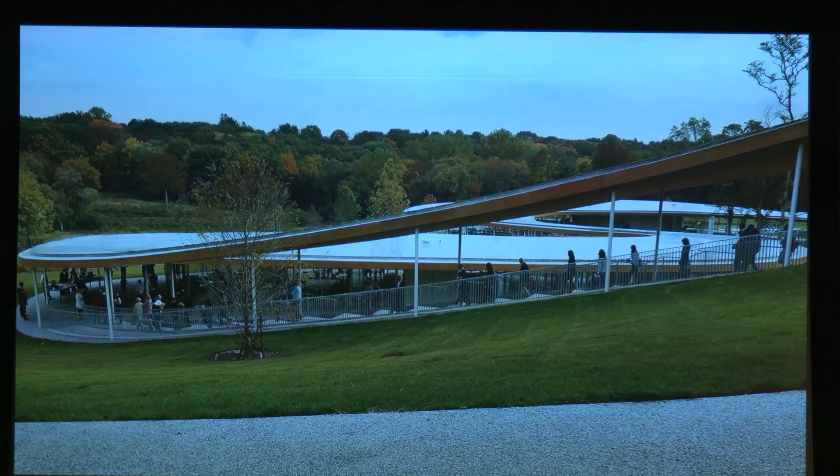So the project I want to show now is Grace Farms in New Canaan, Connecticut by SANAA. We did collaborate early on with this project with Dr. Sasaki in Japan, who is SANAA's longtime collaborator, amazing engineer, and I give him full credit for validating a lot of the ideas that we sort of worked through and giving us support. He did not have to do that. He was very generous with his support and what he offered to the client as confidence in the design that we were working on.

Grace Farms, for those of you who don't know it, is this incredible facility. I recommend all of you take a pilgrimage there at one point. It is a foundation that supports the arts, nature, it now has started a massive movement to eradicate human slavery from the built environment, of which I'm part of. And it is partly a sanctuary for a privately funded church that holds services there on Sunday. It is more than anything the foundation, though, I've learned over the years.

So we knew early on, and we had not worked with SANAA, but remarkably, we had worked with every other member of the team, including the contractor and the client representative. So we had a good sense of what we all were after. We could band together and sort of understand what we were after. But we knew early on this was as close to a napkin sketch as I've come, and I'm sort of undermining my underlying theory by suggesting that I need a long-term relationship. Sometimes it does just come to you.

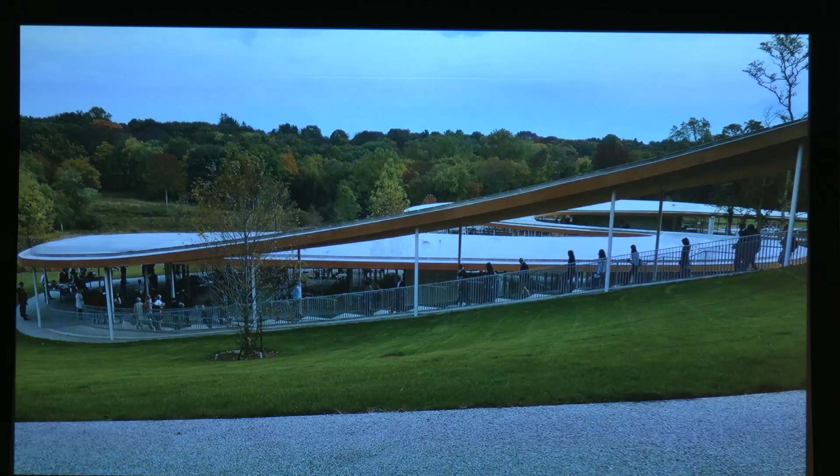There was this idea of meandering the river going down the hill, and there were these columns throughout the entire project supporting a continuous roof. We knew, looking at it, that there was nowhere on this job that SANAA would allow a moment frame or a cross brace. This was not a language where I was going to sit down at the first meeting and say, it's a really lovely diagram you have there, but we're going to have to throw a couple of moment frames in there.

So from day one, the entire parti was, and this is the meandering river the whole way down with 5 pavilions enclosed by glass, but the roof is continuous. This is the sanctuary, the library, the dining hall, the tea room, and the basketball court. This is basically the early parti. That's the columns, 168 columns. So from day one, we knew this entire project had 4 components and 4 components only. And the only way we were going to get this built was to be able to constantly hammer away at the refinement of the most basic story of these 4 components.

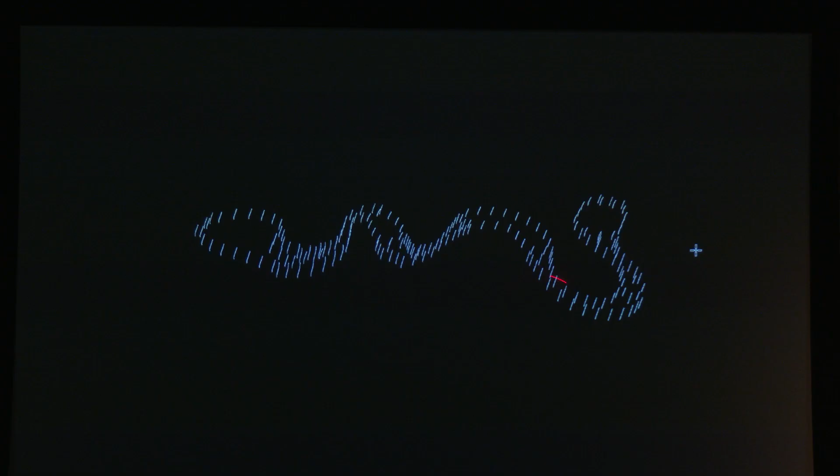The first were the columns. Every single column designed as a single flagpole cantilevered from its foundation. Not a single moment frame or cross brace anywhere on this job. So the only lateral system on this job are the flagpoles.

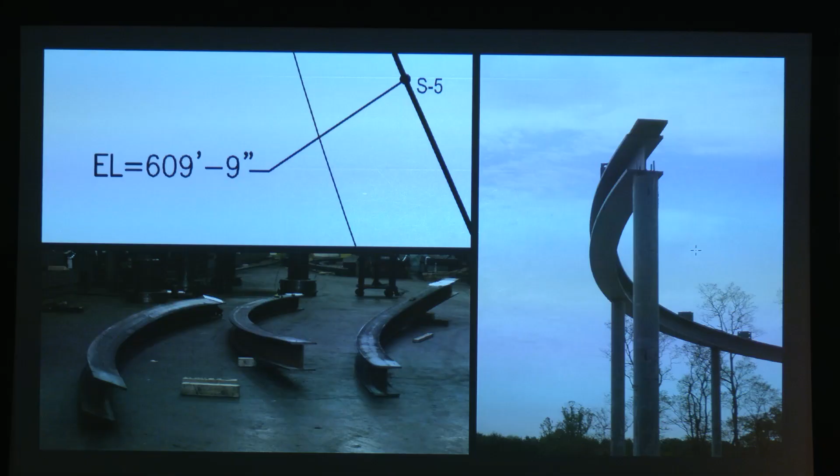At the pavilions, they're connected by a curved 10-inch by 10-inch steel beam, same size on every pavilion, same size in every location, sized for the worst span between columns in one of the pavilions and the worst load, and then just fabricated in Ohio, shipped to New Canaan, and erected on top of the columns to establish the shape of each pavilion. Digitally designed, sent off to the shop in a Rhino model, comes back nice and curved and over each column. The columns in this case, as we went about documenting the project, there's a column schedule that I don't show here. 168 columns, X, Y, and Z coordinate at the bottom, X, Y, and Z coordinate at the top.

That's it. Cut this many columns and move on. The only time that I will get on Dr. Sasaki: we designed 4.5-inch solid columns. Those were value engineered to 6 5/8 steel tubes. We toured the building with Dr. Sasaki a year after it opened, and

Dr. Sasaki looked around with the owner, who I know very well now, and said, in Japan, we would have done smaller columns. And the owner looked at me and said, why didn't we do smaller columns? And I did not say to her at the moment, because we value engineered to larger columns. Owners don't like to be reminded of that sort of thing.

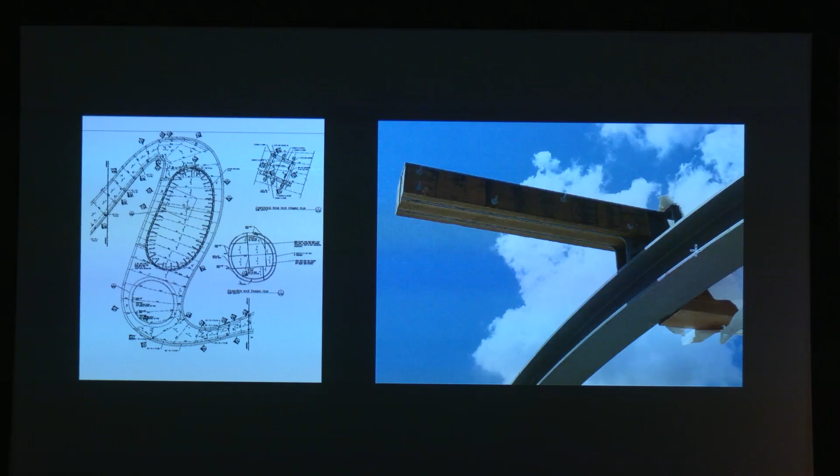The cantilever of the roof, achieved in some cases with steel flitch beam design within this glulam. The third element being the glulams that span between the rings. We looked at all different combinations. We could have done different size glulams. We could have taken the same glulam and spaced them closer together. We had a little bit of a problem. We had 2 pavilions that were over 45 foot long. If we designed the same size glulam for the worst case, it was a glulam that almost couldn't get down the curved roads of New Canaan.

So we worked with SANAA. We came up with a singular size of glulam that we used on the entire project all the way down the river. I think it's 28 by 18, somewhere in that range. And at the pavilion and at the sanctuary and at the gym, we simply turned those glulams into the top chord of a king post truss.

We went to SANAA early on and we showed an arch structure, we showed a cable structure, we showed them all sorts of things, and they did not want a beautiful flat river that ended up a little like the snake that swallowed the mouse at the end, so they voted very much for the truss idea.

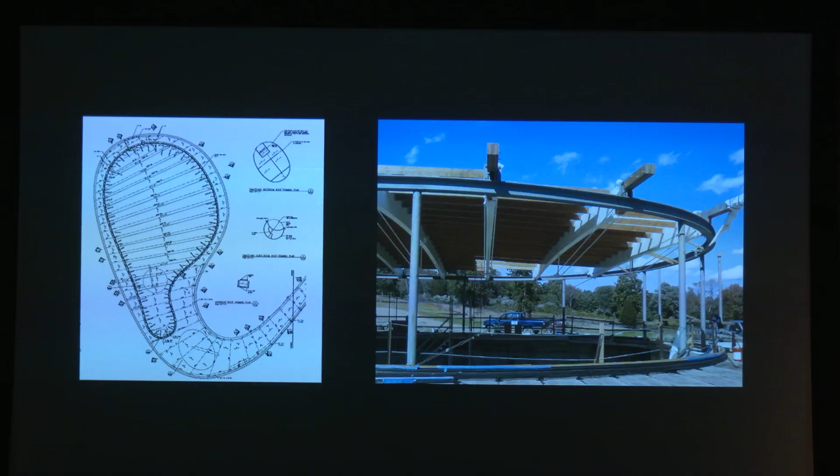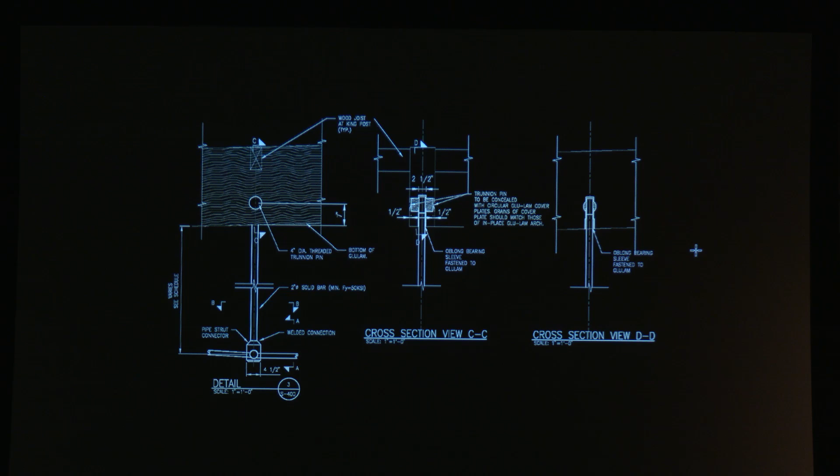Working with Dr. Sasaki's assurance to SANAA that we knew what we were doing, we created, for what you can get away with on a decent budget, some incredibly beautiful details. You see the end of the glulam, which is the identical detail to the glulams throughout the project at the edge of the 10 by 10, with the tension rod coming into a curved end, which is split ring fastened into the end of the glulam, and a washer to hold the tension back as a chock block at the end of the truss, just like old-fashioned bridge trusses of the 1800s.

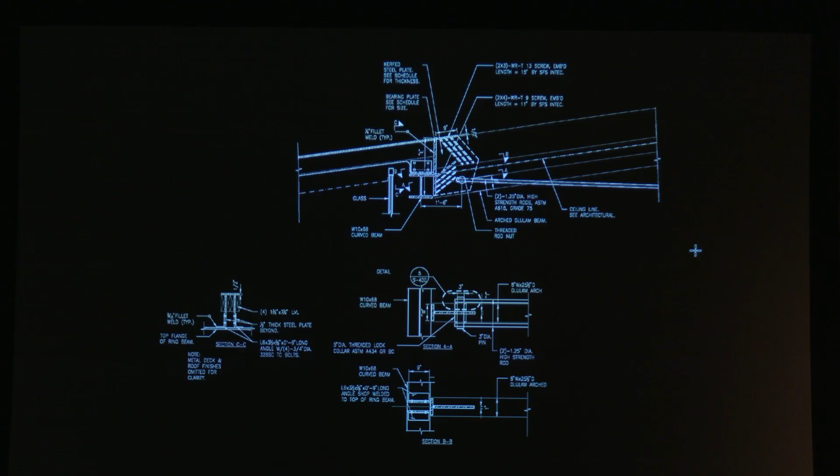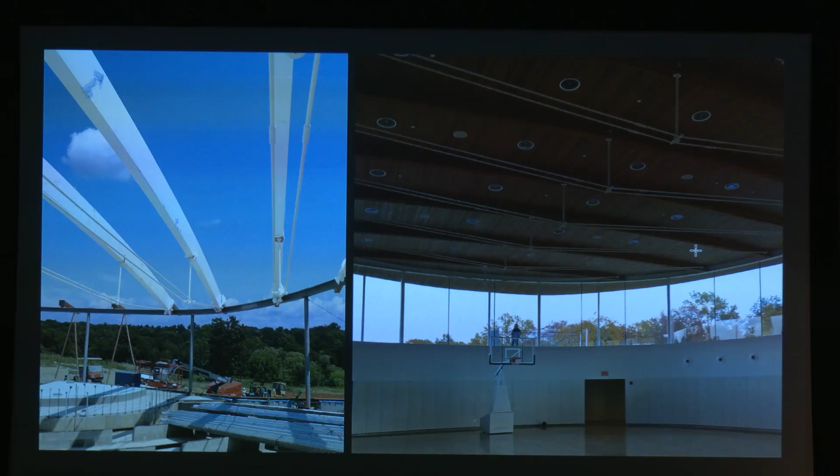This is the plan view of those details as they were built, and the finished view of the gym building. In the gym, the spans were a length that we went with a single post; in the sanctuary, a double post. The gym being sunken below ground, I haven't even spoken about the cantilever retaining walls that made up the gym and some of the fun we had down in the basement. The finished space is quite unique, and the client has been incredibly supportive of both Silman and the project and our work there, which is always a nice outcome as well.

So my final images this evening speak to the future of collaboration and the optimism I have for the future. If I've learned anything along the way, it's that Mario's words from 1958 were prophetic, or perhaps obvious. This is a group culture, and yet it is really, really difficult to get a building built with a large team. As technology advances, the ability for all team members to simultaneously inhabit the same model, invent and advance is upon us. Trust me, it's upon us.

Which means that the need for each team member to be concise in their thinking and for the language between us to be clear is critical. Often these exchanges can get confusing, messy, and fragmented. Over the past few years, however, I found solace in a return to the most basic fundamentals of structural engineering within the universe of big data, which of course harkens back to your own mission statement.

Building a model and designing a beam or column is now, after 20 years or so of software development, fairly bulletproof. It is rare for a senior engineer on a project to review every beam calculation or frame analysis. And the time you are given to do so, frankly, is not conducive to a member-by-member check. Does that mean we rely on the computer and assume it's right?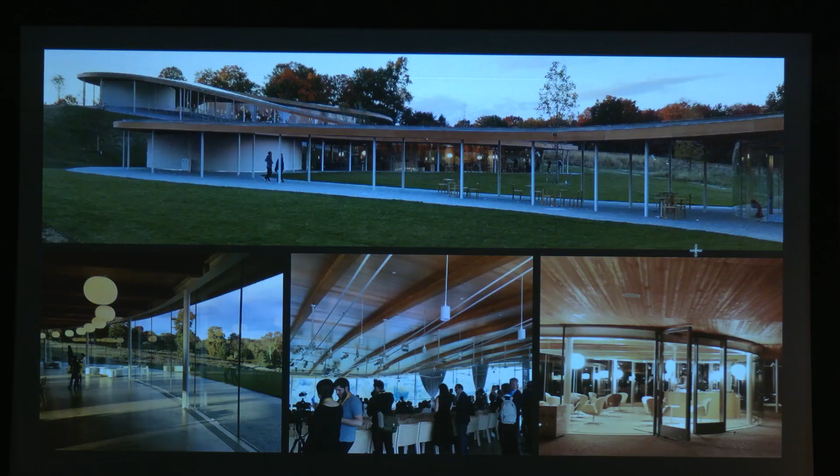Our language is now wonderfully, it seems, almost full circle to the basic fundamentals of structural engineering. After 60 years or so of intense calculation and the fetishizing of quantitative analysis and parametric modeling and all the rest, we seem to have temporarily arrived at a moment where that is finally automated. So rather than close up shop, we choose to engage even deeper, to speak the graphic and diagrammatic language that architects too seem to have chosen.

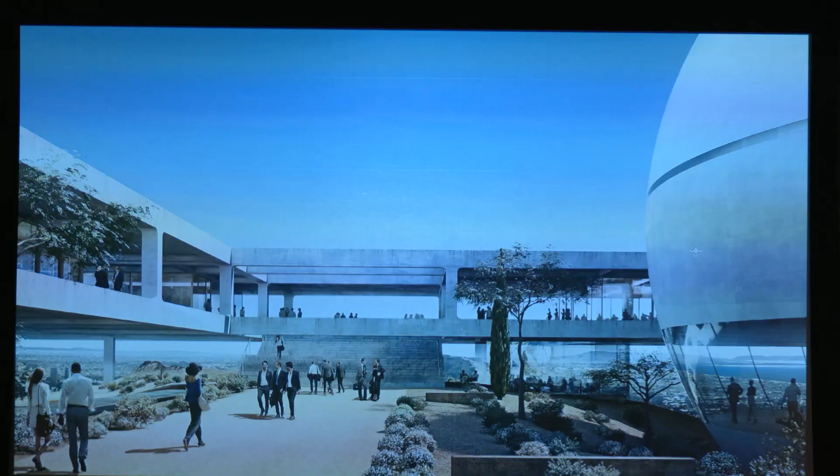A project we worked on, it's now on hold, the Berggruen Institute in LA, up on an amazing ridge, unbelievably cleared of all foliage in the fires last fall, unfortunately, but I guess they're a step closer to construction. This is by Herzog and de Meuron. It is a ring project about 350 feet by 150 feet, held up on very few columns on the ridge of this high seismic zone with a massive auditorium dome and a water tower, which we also want to use as a damper for seismic shaking.

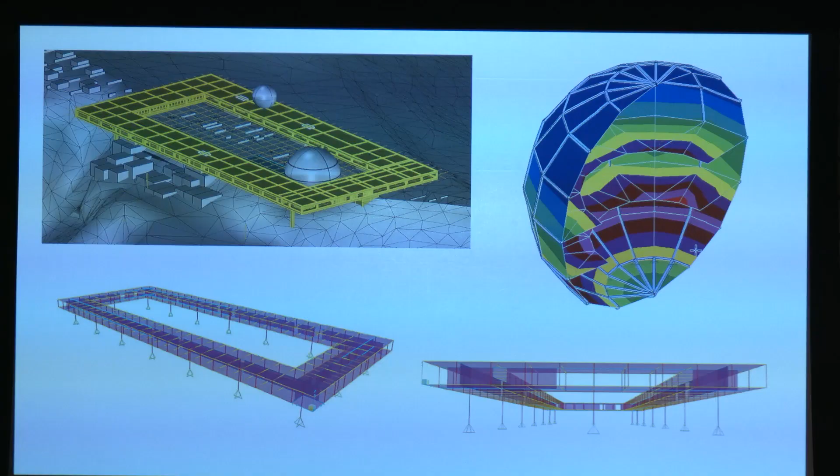This was essentially done through concept design over the course of 8 weeks with Herzog de Meuron, where we basically round-tripped through Rhino models and were able to give them studies in precast concrete, post-tension concrete, cast-in-place concrete, steel design, and CLT and NLT, nailed laminated timber, all within the course of 8 weeks, producing ultimately a matrix of quantities and pros and cons that allowed them ultimately to get to a precast series of elements brought together by post-tension strands. Unfortunately, held up in schematic design due to various permitting and so on, not of our doing. Hoping to get back on track soon.

Recently, after going through a bunch of design assist work with the steel fabricator, who's from Italy and amazing, we realized that we had spent a little too much time as an entire team turning everything on the project into steel because it was easy. And we had ballooned from about 1,500 tons to 4,000 tons of steel, freaking everyone out, including us. Although we tracked that along the way, I think the impact was not understood by everyone because we kept figuring the steel replaced some other material, but not to the degree it actually did. We were able as a team, led by our firm in the last 3 weeks, and through this round-tripping process and fat pens and trace paper, to reduce the steel back down to about 2,000 tons.

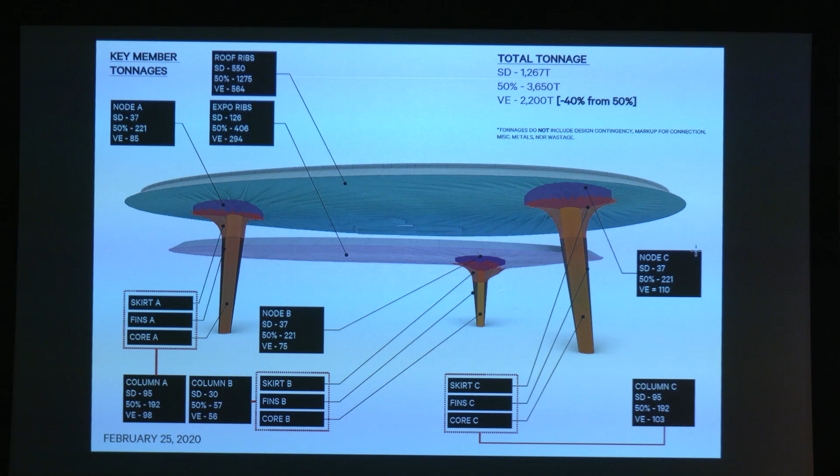Which the client is getting their head around as reasonable upping from SD rather than the 2,500 ton increase that we had found. But generating these diagrams is only possible these days. There is no way you do these 2 or 3 years ago, where we get a Rhino model from the architect and within a day are able to produce a basic working SAP model to reality check the behavior of the frame. But how do we tell that to the owner?

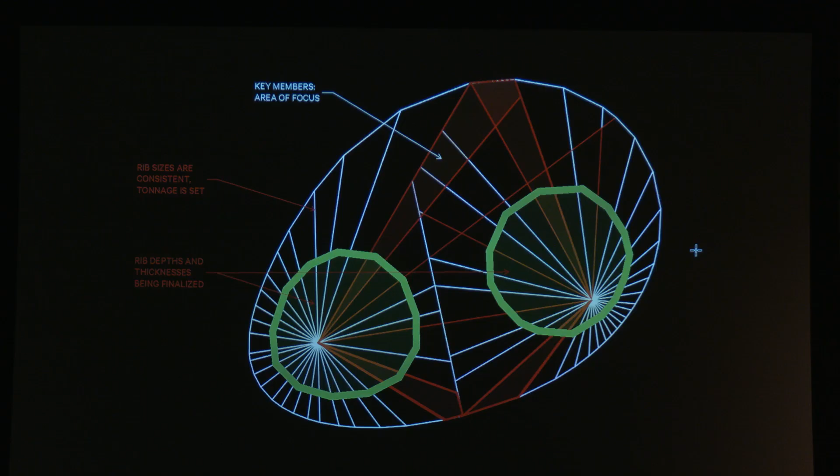The owner has engineers on board. They think we're all insane. They want to understand where the load paths are. And so we've come up with a series of our sort of version of fat pen sketches to go back to the owner and explain where the general forces are, talk to them about how the building is working. More importantly, these diagrams are what I'm talking about. When you're lost in these models, you have to be able to demonstrate the basic workings of the building.

One thing we got to early on that still is causing a little consternation, but we are very sure is the right way to go, is the idea that the cantilevered top portion is a tabletop that is pinned at the column. We were finding early on that the cantilevers way out the end were punishing the columns. And so what we discovered was that if we released the frame and let the back arm act as a big tabletop on 3 pins, the columns could be actually much more efficient.

More importantly, when we did that, the reactions at the base became much more consistent. They were just 3 big flagpoles with the same amount of load, and every time we tweaked a fin, we didn't impact the moment at the base. Why is that important? Because the foundations are going in the ground months before the steel design is done.

So understanding these basic principles allows us to both speak to the architect and the client and have that collaboration in a way that doesn't alienate the client or piss them off that we're trying to hold things from them. It allows the architect to design in a way where they really understand where they're trying to put their effort. It allows us some freedom to then design within these constructs. More importantly, it allows us to reality check our own models.

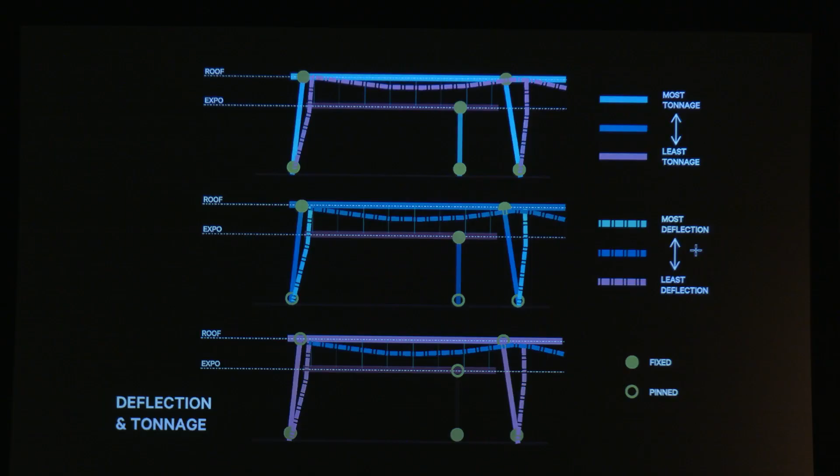And finally, high up in this organization were a bunch of people that came from the oil rig business who basically want to know why this thing didn't just weigh 12 pounds per square foot and why the hell anyone would do this. And for them, they had their other peer bosses who said they wanted the 3 columns. So for them, we put together a study that basically showed that Silman can design 12 PSF buildings. If you give us a nice grid and you're 12 foot tall and you put some cross bracing in, we get a 12 PSF building.

If you put 400 pounds per square foot of landscape on top of that building, the tonnage increases. If you then elevate it 40 to 50 feet in the air, it increases further. And if you remove all but 3 columns, it increases further. So this diagram was shown to the executives about a year ago, and they gave us the freedom to design a 55.5 pounds per square foot steel structure because they cross-checked that against costs of faking in the steel that would have been a ceiling under our structure.

It's this kind of communication that we've gotten incredibly sort of, we spend more time figuring out how to make these diagrams than bragging about the thousands of pages of calculation that SAP spits out. And so I want to end where I began, sort of, with my own firm's mission statement. It's simple and does not include anything about making money, which pisses off some of my partners. And it is simply joy with meaning.

That's our mission statement. Why joy? And how does that connect with language or communication or collaboration? Because all of this language learning, communication, collaboration, failure followed by success, and sometimes more failure, iteration, and searching is really, really difficult if not fueled by joy. If I bring you anything concrete this evening, it is that I've confirmed a simple truth over the years. All of what I've shown you was fueled by joy.

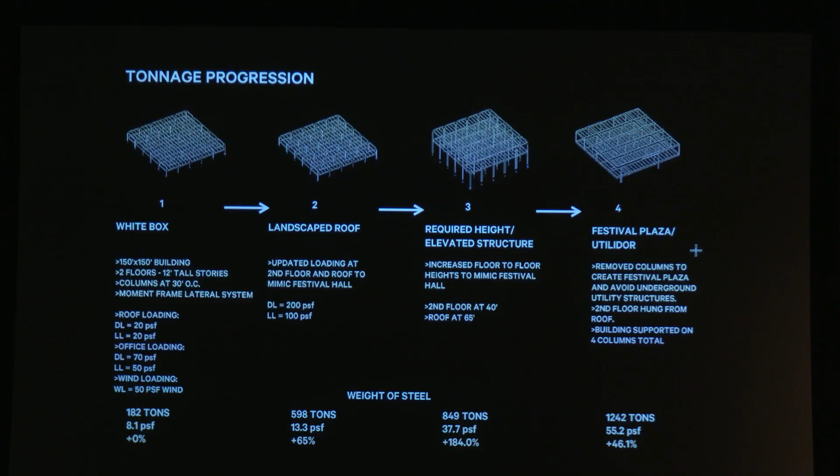Joy that I got to participate in creating things that change lives and inhabit the landscape for years to come. Joy that does not come from other professions. Our profession is messy. It is difficult. But in the end, if you're lucky enough to see your designs built, it is joyous. And joy begets creativity, which begets collaboration, which begets learning, which begets, of course, more joy. Joy is to happiness as language is to communication. Joy and language are deeper, ever present, and ever evolving.